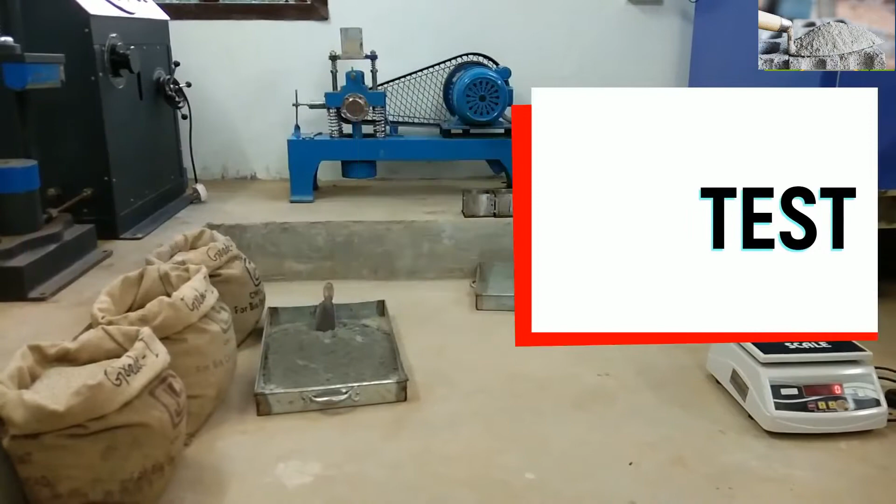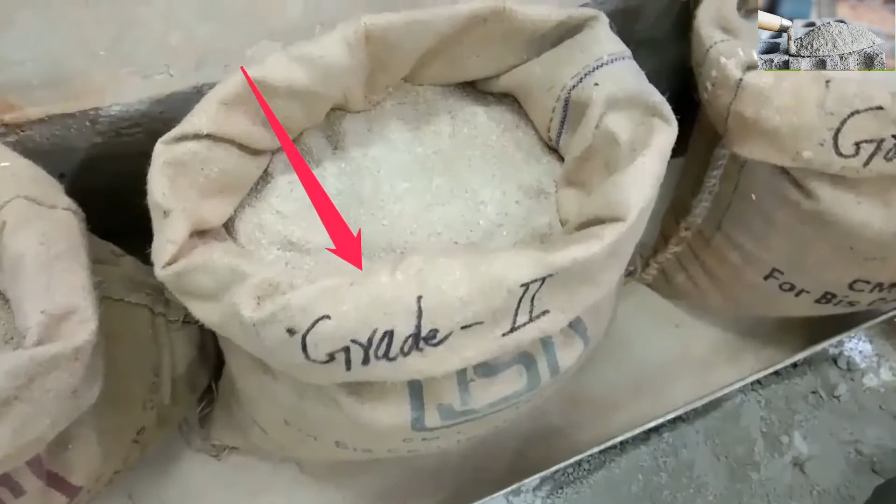Let's understand the cement strength test. To conduct this test, we require the sand. The sand is mixed with the cement so that dry shrinkage of cement will not take place. We require cement. To weigh the material, we require an electronic weighing machine, and to mix the material, we require a trowel.

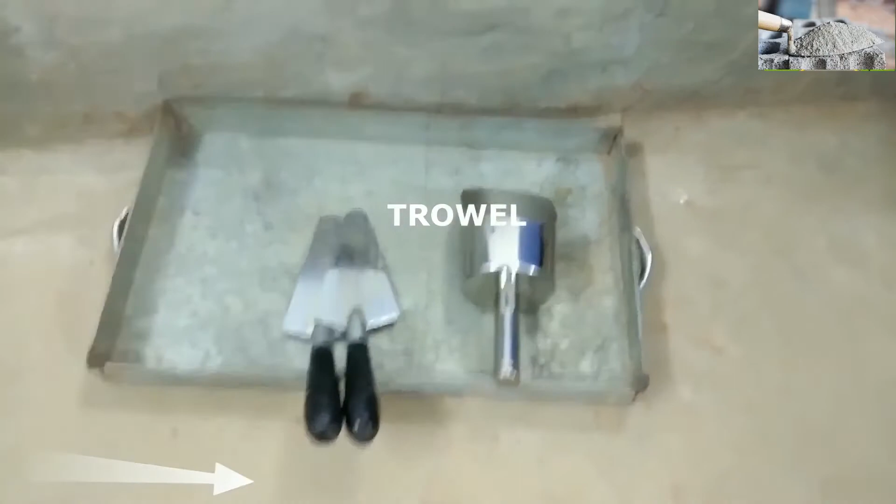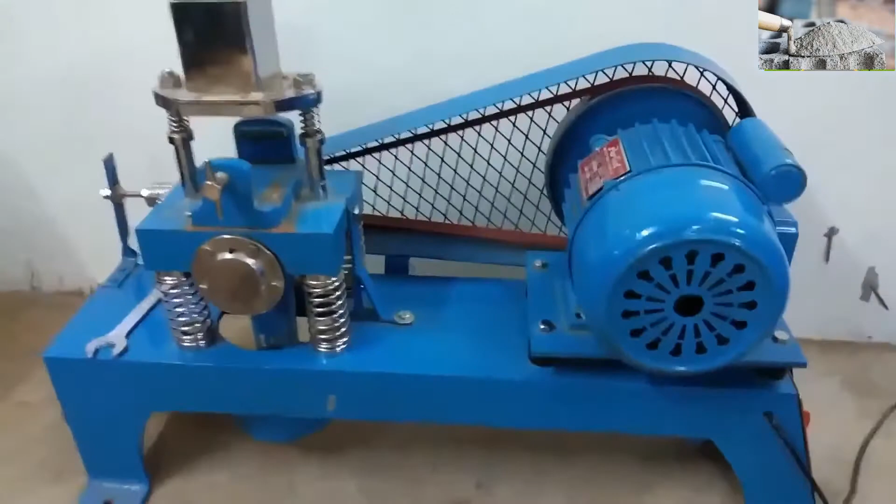A cube of size 70.6 mm in all three dimensions is required, and a vibrating machine with a capacity of 12000 revolutions per minute is required, and the timer is required to note the timings.

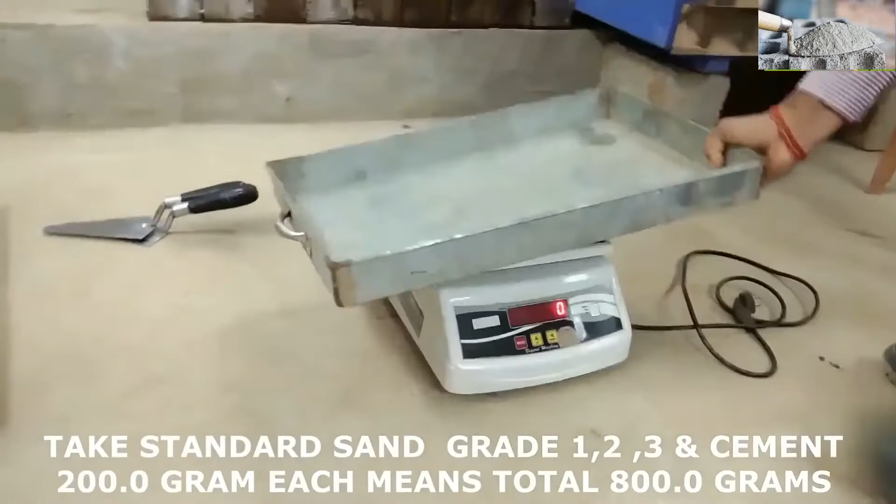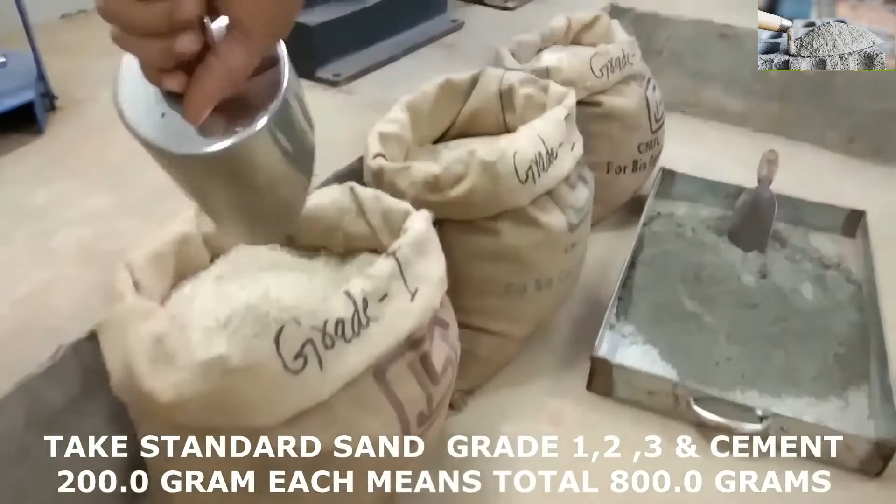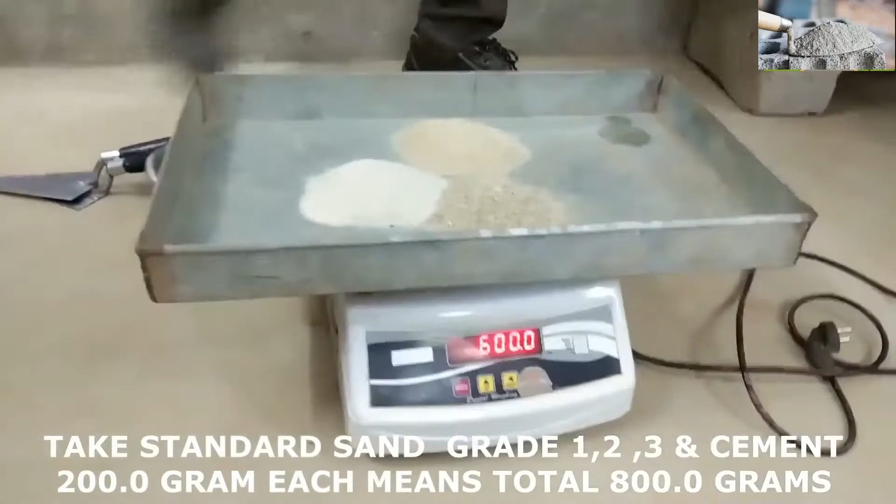Now first we will take the sand and cement. So the ratio in which the cement and sand is to be taken is 1:3. That is 1 part of cement and 3 parts of sand. So if we take 200 gram of cement, we have to take 600 gram of sand. So to 3 parts of sand, we will add 1 part of cement. So 600 gram of sand, 200 gram of cement make up 800 gram of the total sample.

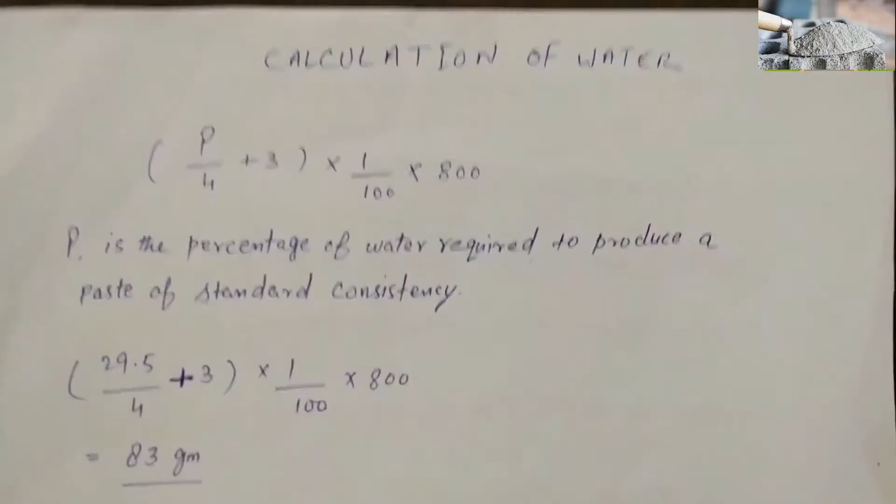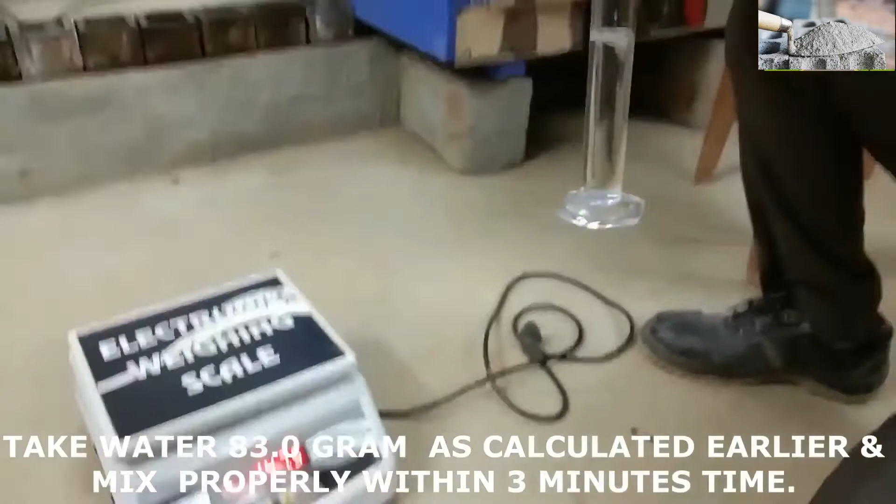Now the next process will be the dry mixing with the help of a trowel. Now we will add the water. The water added will be 1/4 of the standard consistency plus 3% of the weight of the cement. So if our standard consistency is 36, then the 1/4 will be 9, plus 3%, that is 9 plus 3 is 12. So 12% by the weight of the cement, the water will be added.

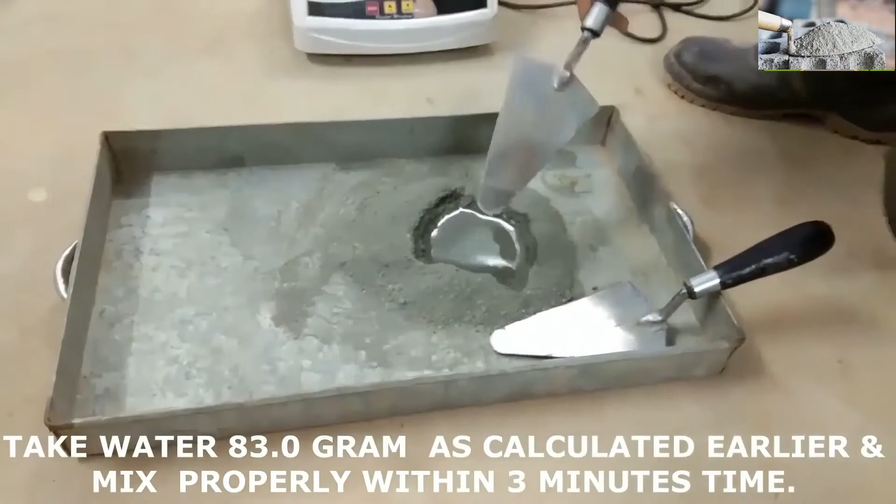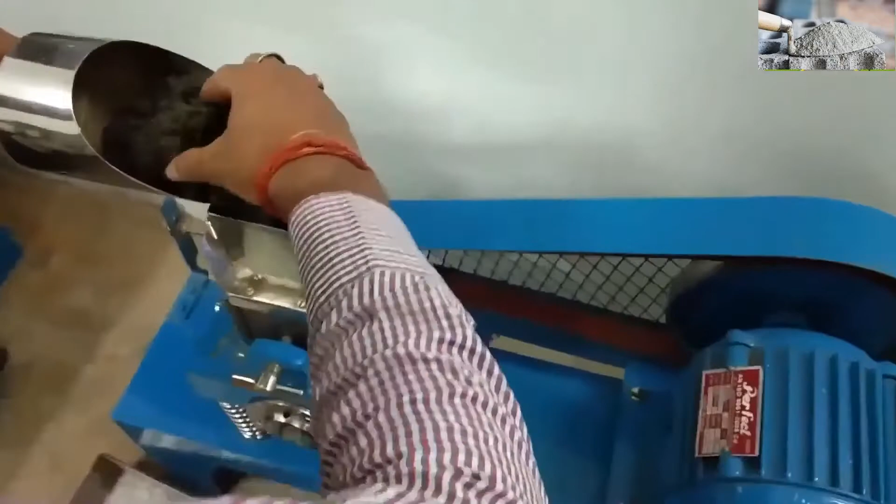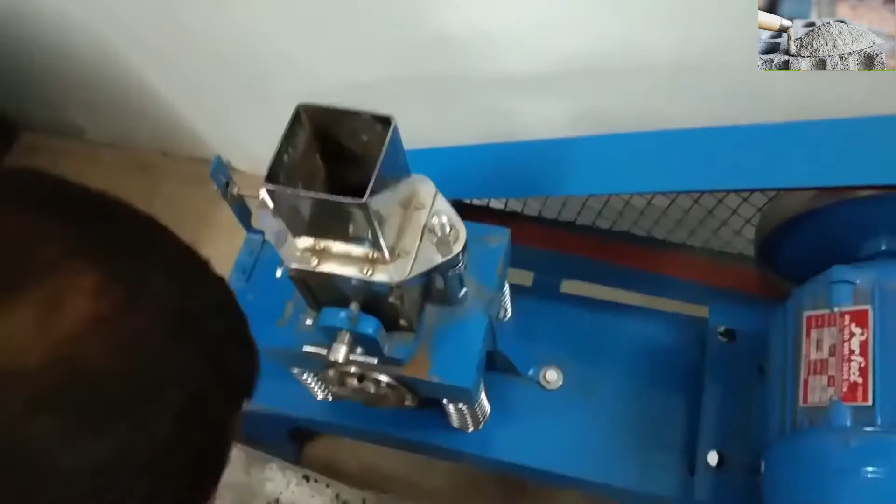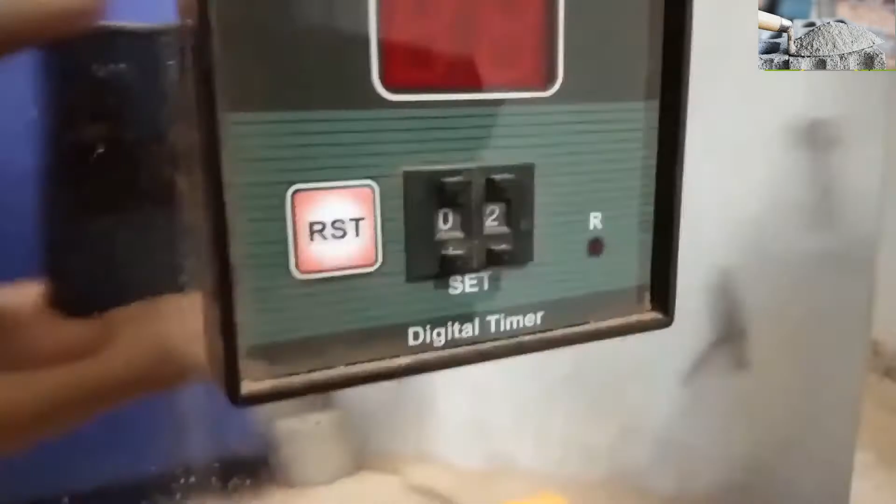The sample paste will be mixed thoroughly within 3 minutes of time. After thoroughly mixing the sample in 3 minutes, the sample is filled in the mold. The mold has each dimension 70.6 mm, hence each surface area is equivalent to 50 cm square. So the mold is completely filled with the sample, and the compaction is done by the vibrating machine at 12000 rpm. The period of vibration should be around 2 minutes.

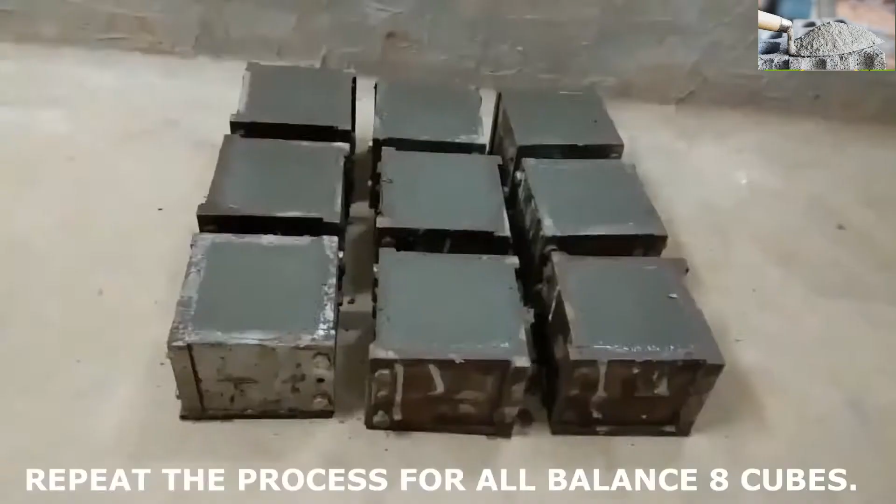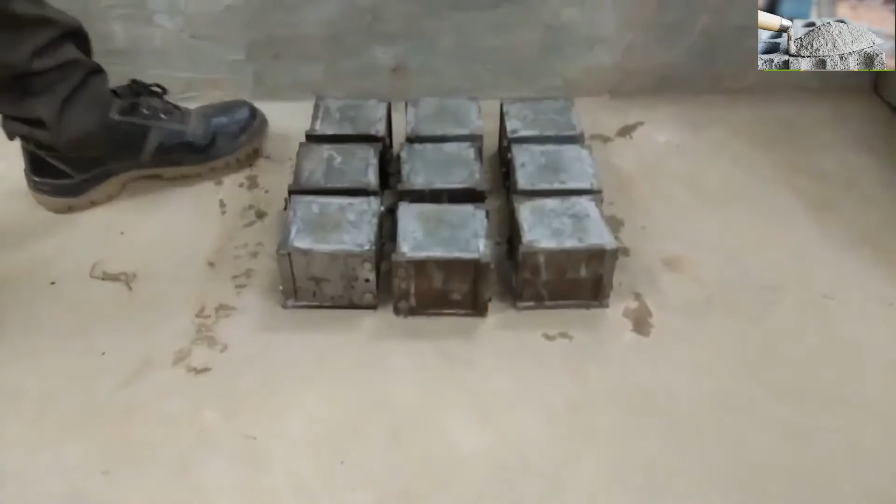Once the sample is completely compacted, level the top of the mold with the trowel to receive a smooth surface. Now we will make more samples of the cement sand, similarly as we created the previous one, and then for the next 24 hours we will cover them with a gunny bag. The purpose is to provide a 90% relative humid condition so that proper hydration of the cement takes place. After 24 hours, the cement and the sand would have gained sufficient strength.

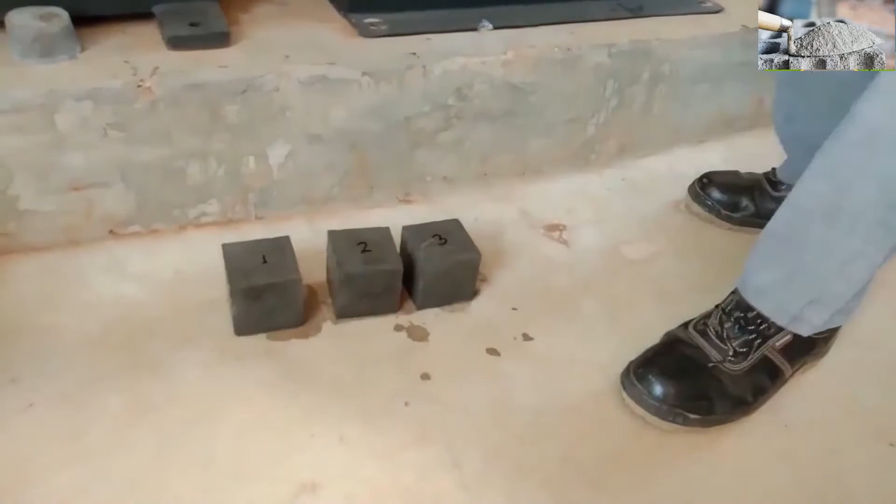Now the numbering of each mold will be done. After that, it will be kept in a tank of water. Once we do the marking on each of the cubes and assign a date and an identification code to each cube, then we can keep it in the water for further curing. Then 3 cubes each for the 3rd day, 7th day and 28th day will be tested.

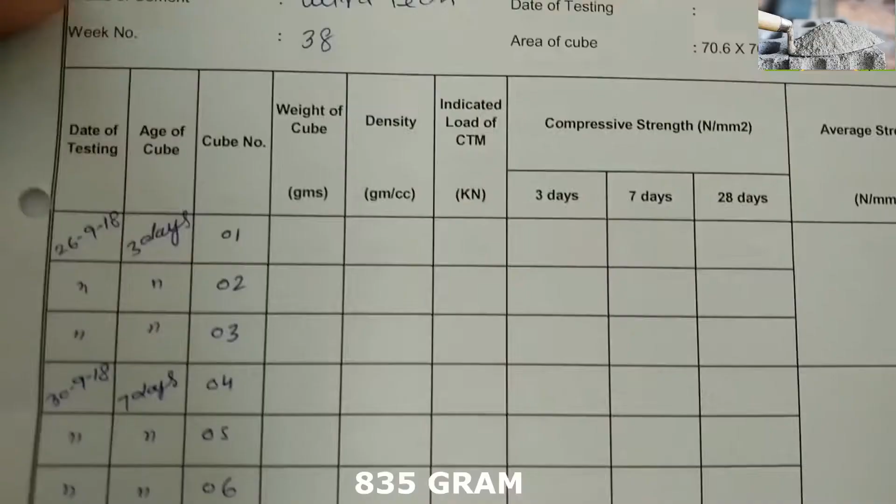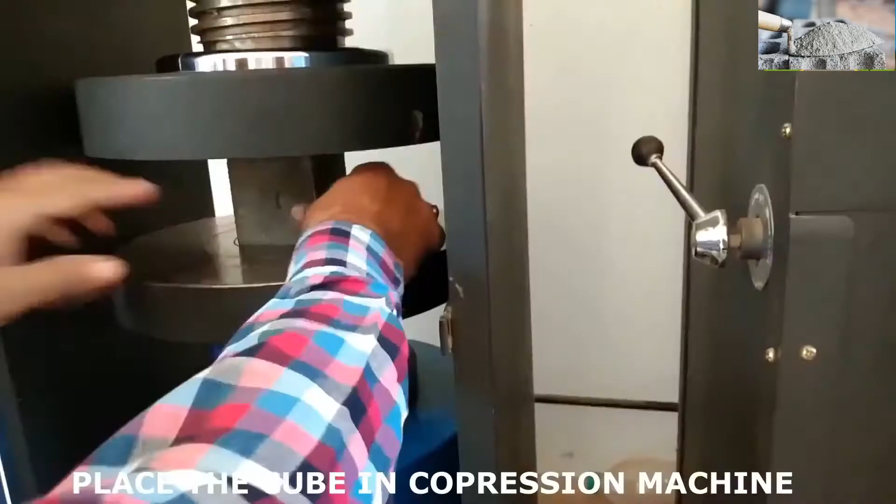So on the 3rd day we will take out the 3 cubes. We will measure the weight of each cube. We already know the volume, so we can find the density of each cube. So suppose the first cube weighs around 835 gram. We will note the weight, then we will place the cube in the compressive strength testing machine. Then we will apply the load and take the reading at the crushing point of the cube.

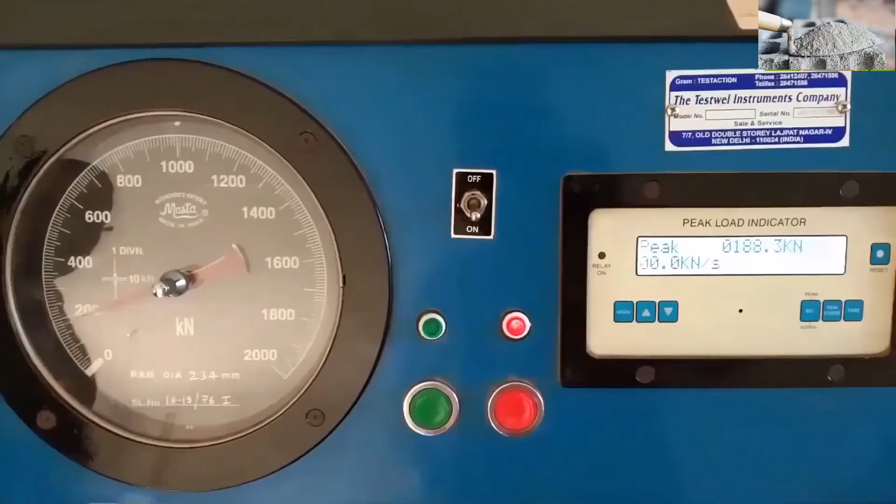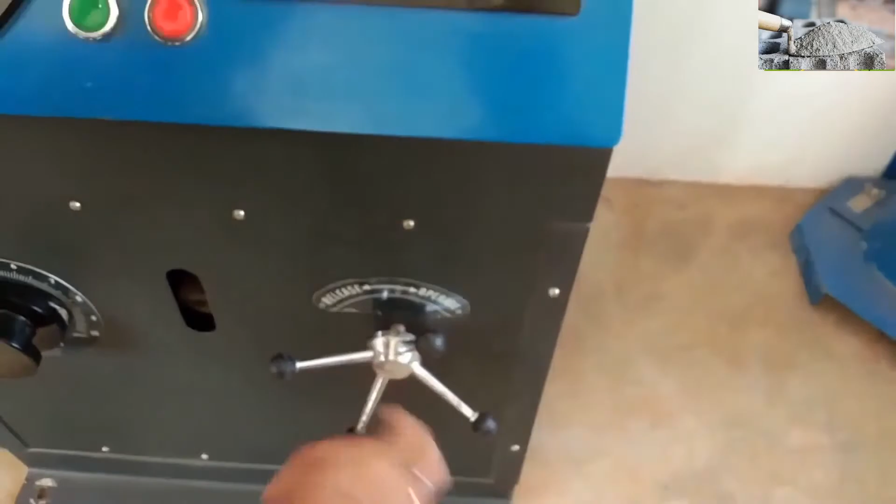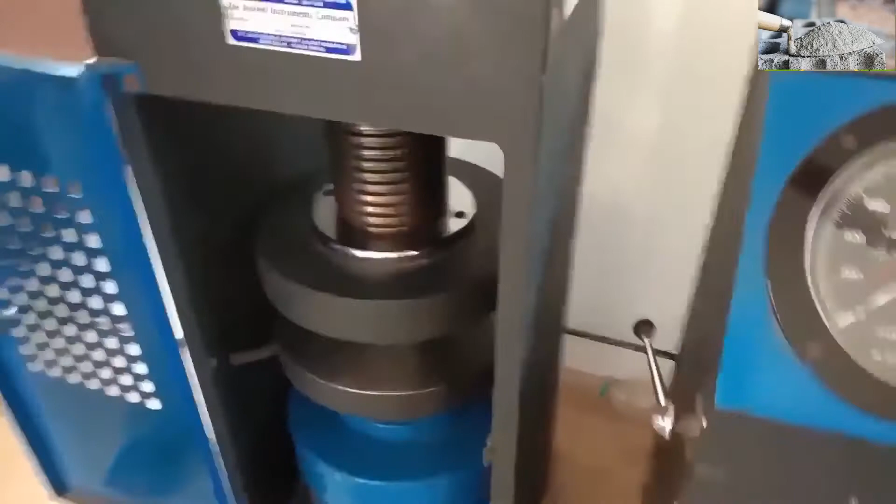We will increase the load slowly and check the load at which the crack has developed. So let us say the indicated load of the compressive test machine is 188 kN. Similarly, we will note the reading for the other cubes and observe each cube until the cracks start developing.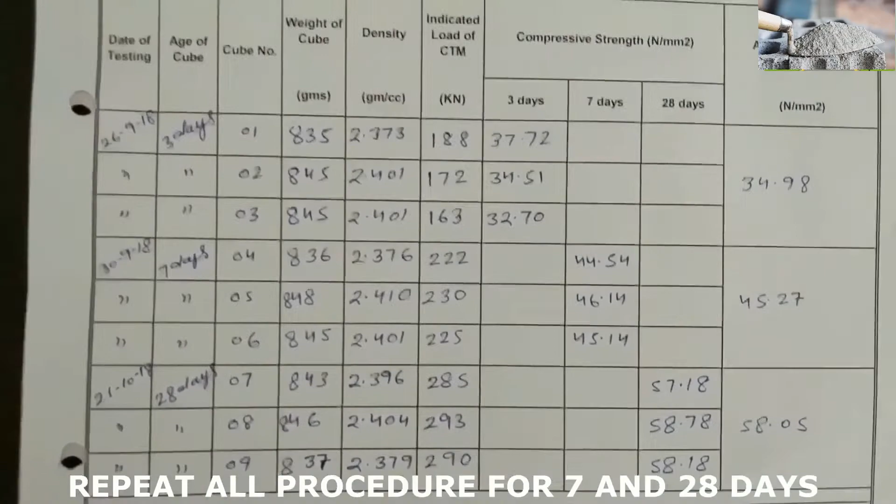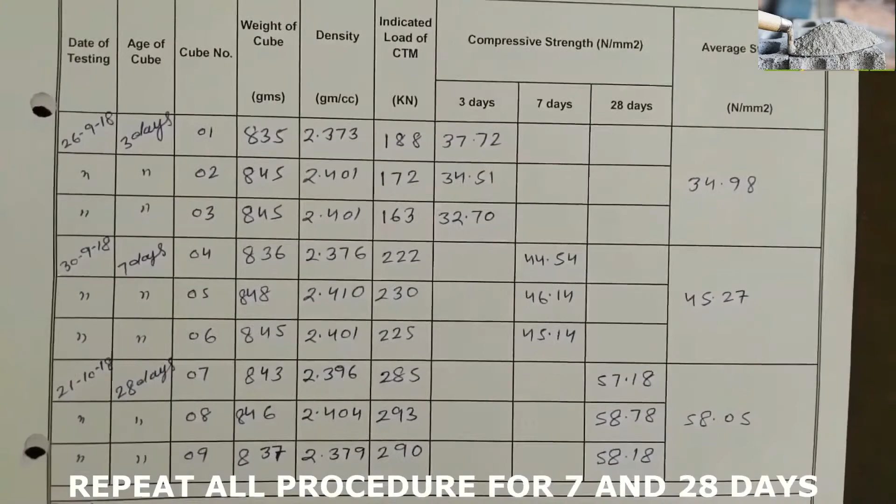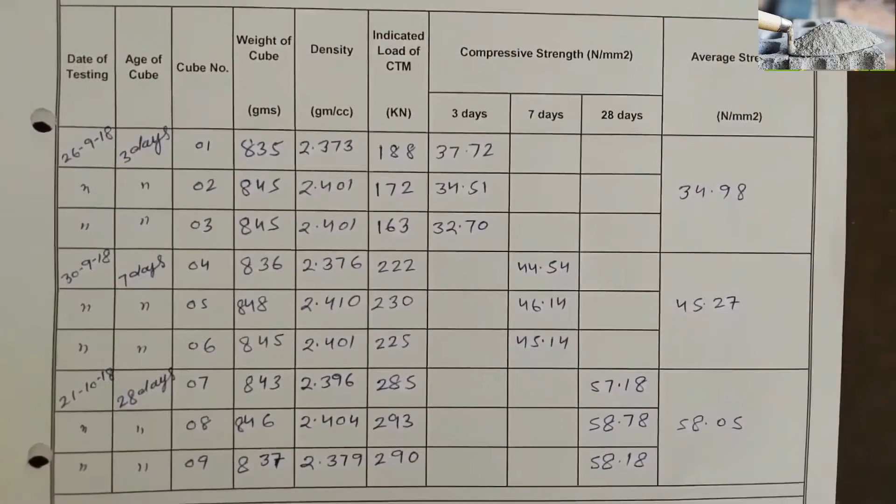Once we receive the load bearing capacity of each cube, we will find the compressive strength, which is in Newton per mm square, since we already know the area, and then we will find the average compressive strength of the cubes. The same test we will repeat for the 7th day and the 28th day, and in this way we will conduct the compressive strength test for the cement.

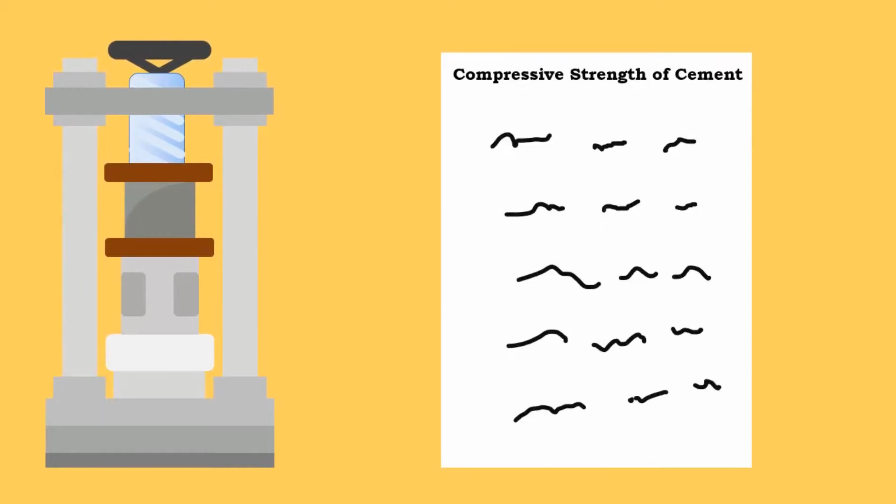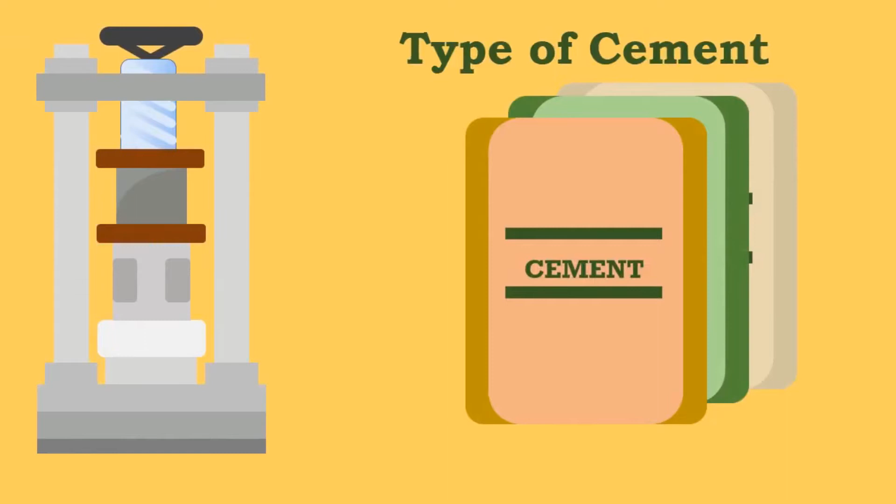Let's conclude the compressive strength test of cement. Compressive strength of cement is the most important property to select the right type of cement for construction work. The strength of cement majorly depends upon the type of cement and the degree of adulteration.

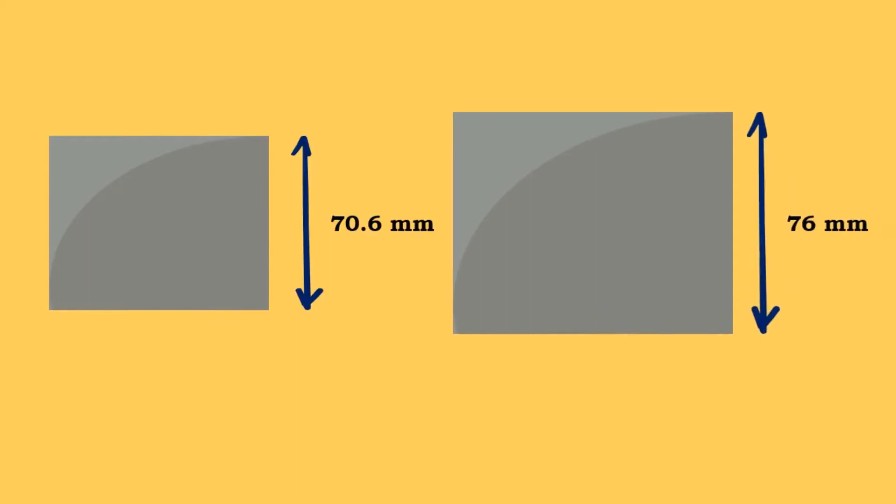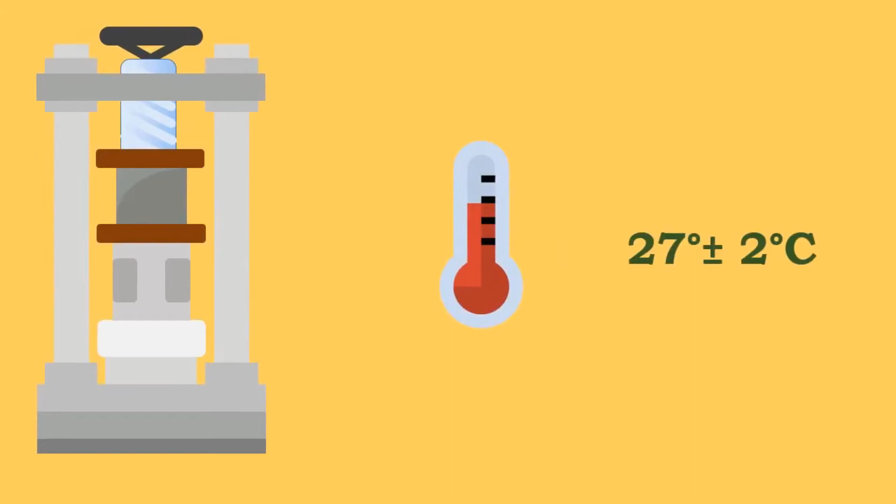The dimension of the mold is such that each dimension is 70.6 mm, making its surface area 50 square cm for each face, and the load at which the cracks start developing is the load which is stated as the compressive strength of a cube at 27 degrees Celsius plus minus 2 degrees Celsius.

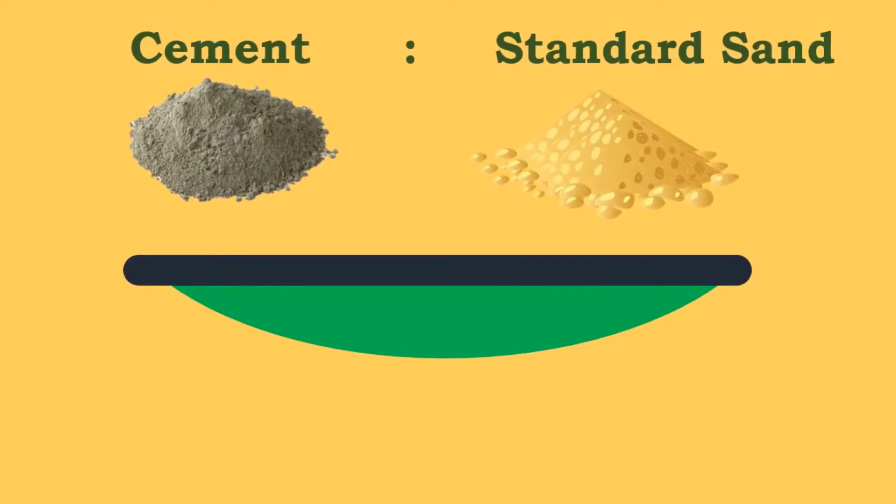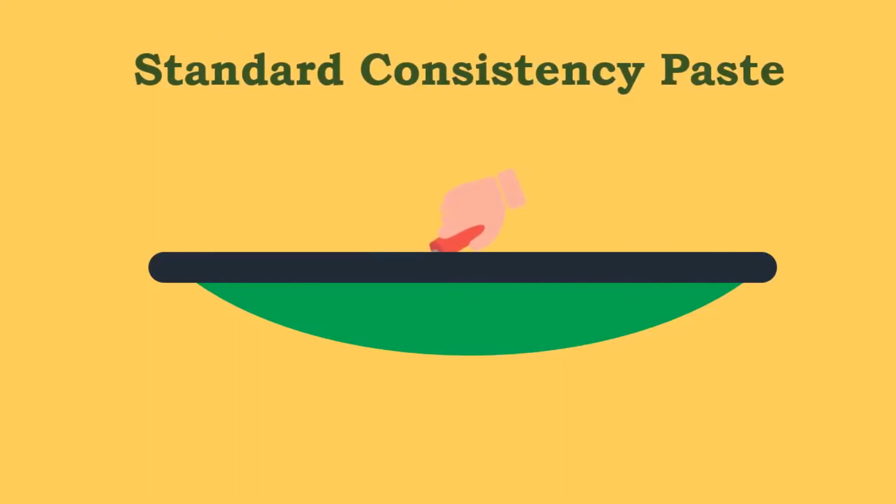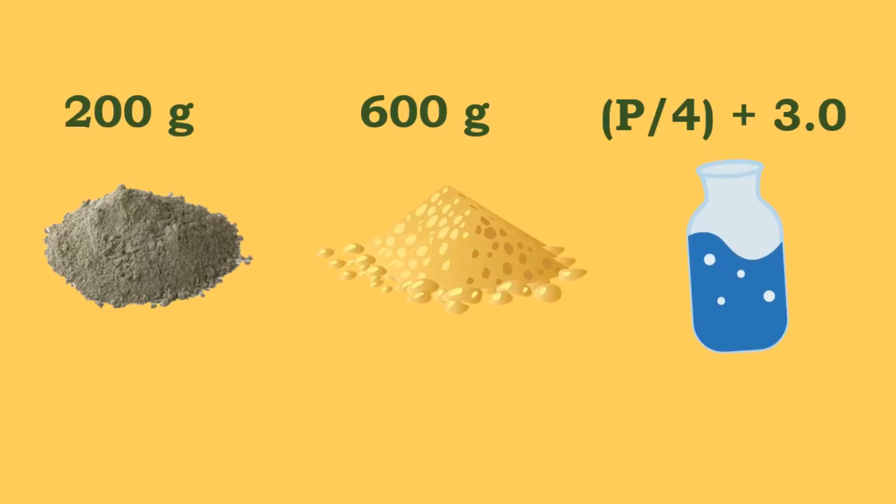So to conduct the test, we need to take cement and standard sand in the ratio 1:3, then the dry mix has to be done, and then water is mixed to make a standard consistency paste. If we take sand and cement in 1:3 ratio, suppose 200 gram of cement, 600 gram of sand, then we will calculate the requirement of water, which is P/4 plus 3%, where P is the percentage of water required to produce a paste of standard consistency.

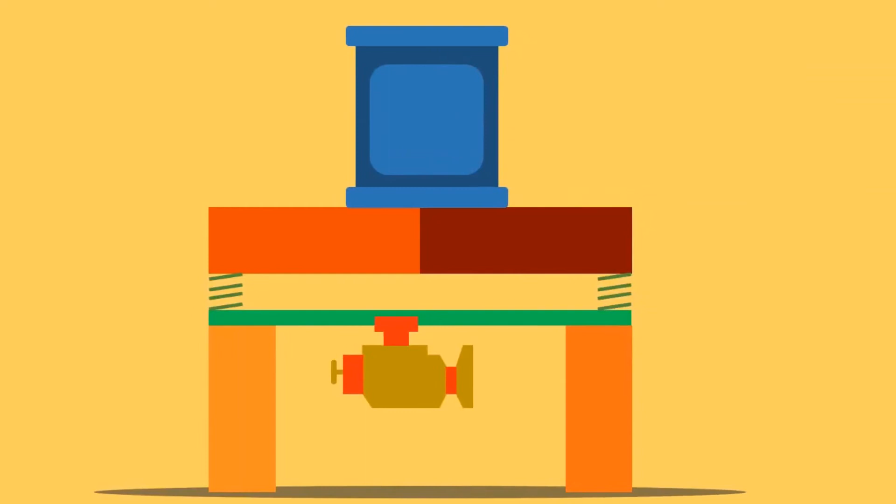Once the paste is made, it is put into the mold and placed on the vibrating machine, where vibrations are imparted for about 2 minutes at the speed of 12,000 revolutions per minute. Once the compaction is done, the surface is leveled and more such cube samples are prepared. Then it is placed under relative humidity of 90% for 24 hours and 100% for the next 3 days, 7 days and 28 days.

It is then tested under the compressive loading machine and a load of 35 Newton per square mm per minute is applied until the cracks start developing. The load at which the cracks start developing is noted, and the compressive strength in Newton per mm square is calculated, which is the maximum load at which the cube fails divided by the area.

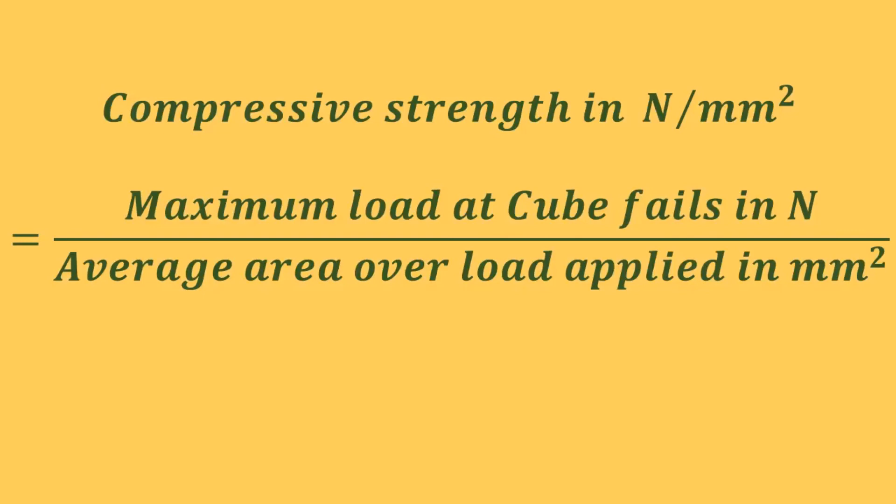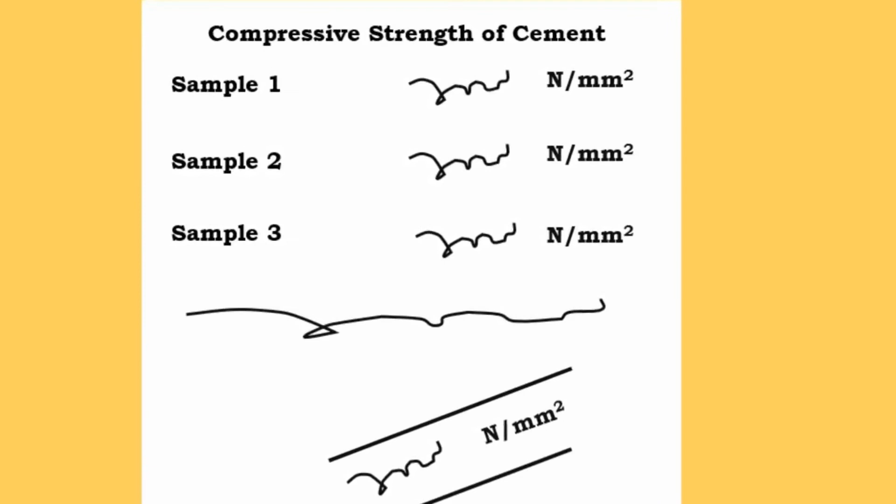3 such samples are tested on the 3rd day, 7th day and the 28th day to obtain the compressive strength of the cement. And in this way we can select whether the cement is suitable for construction work or not.